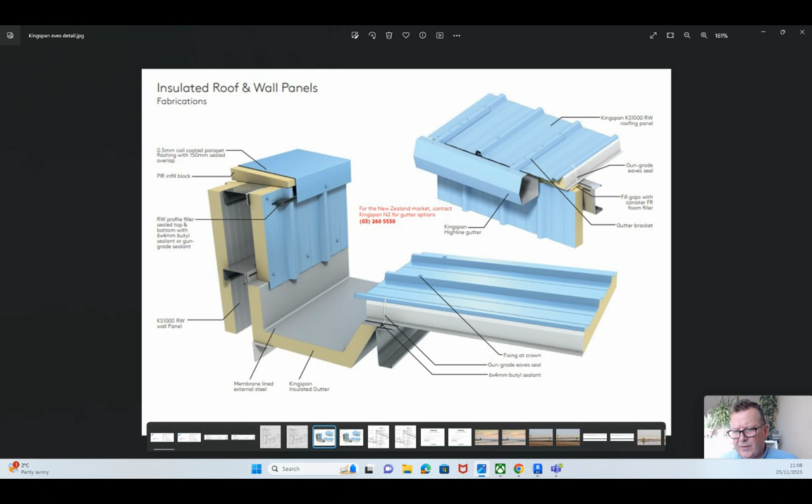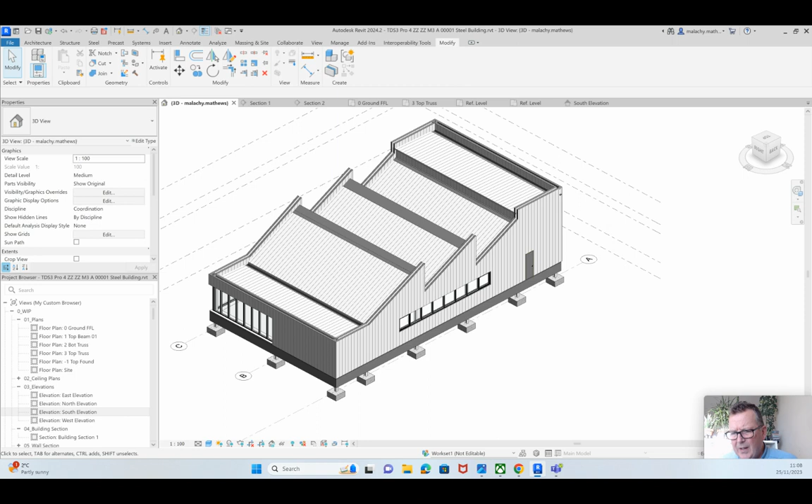Okay, so there's a couple of different ways you can go about this. Plenty of people will tell you different ways to go about it. This one is particularly tricky because it's got such sharp angles and changes in direction. So I'm going to do a model in place. Now, I'm not overly a huge fan of model in place for various different reasons, but in this case, it's probably the only thing that's going to cope with those kind of sharp changes in angles. So that's why I'm going to do it.

Now, first thing we need to do is go into our section and take a distance between the outside of the two walls. That's 444.7. I'm going to take that as around 450. I'm going to add 20 mil onto that, maybe 475, something like that.

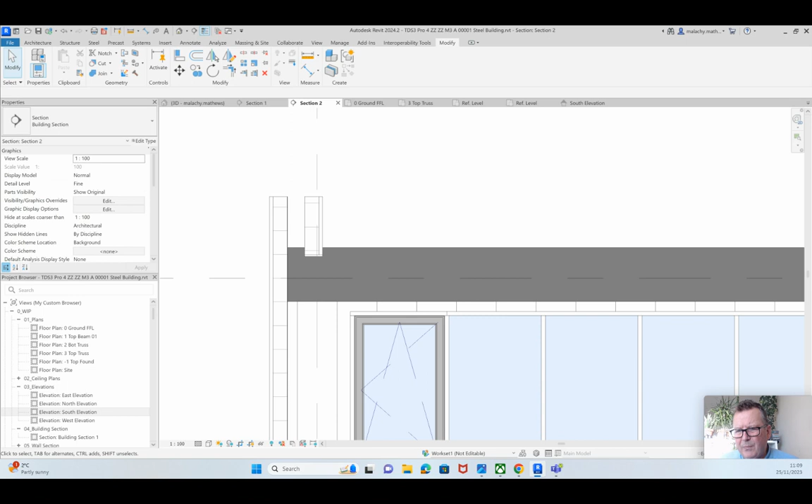Now, I want to create a profile that I can extrude around the walls here. So that's the first thing I'm going to do. So I'm going to do File, New, Family, and I'm looking for this template here. It's the metric profile template, and here it is.

Okay, now these two reference planes are the reference of origin, so the intersection of those two points is the insertion point for the profile itself. Now I'm going to work to the left of this here, because I've done this before, and it seems to work best if I do it to the left.

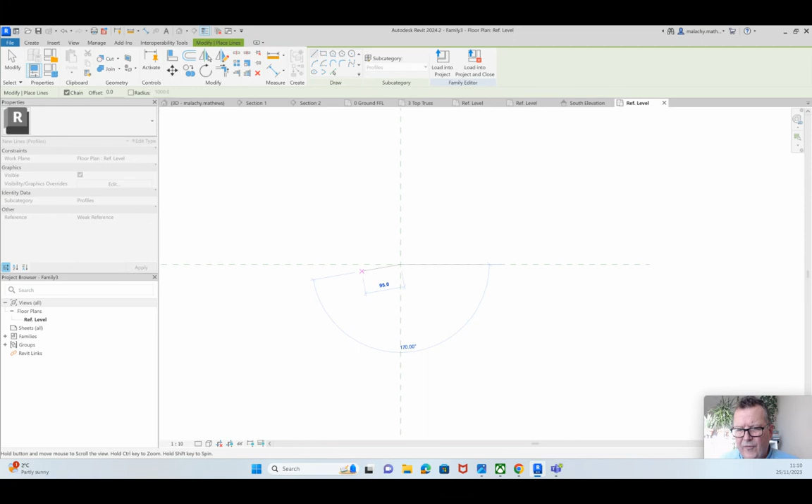Right, so let's get in here now. I'm going to go into create and line, and I'm going to come from this point and I'm going to go over my 450 or 475 as we talked about, okay? So 500, 480 even will do the trick. And I'll come down, say 150, 160 there.

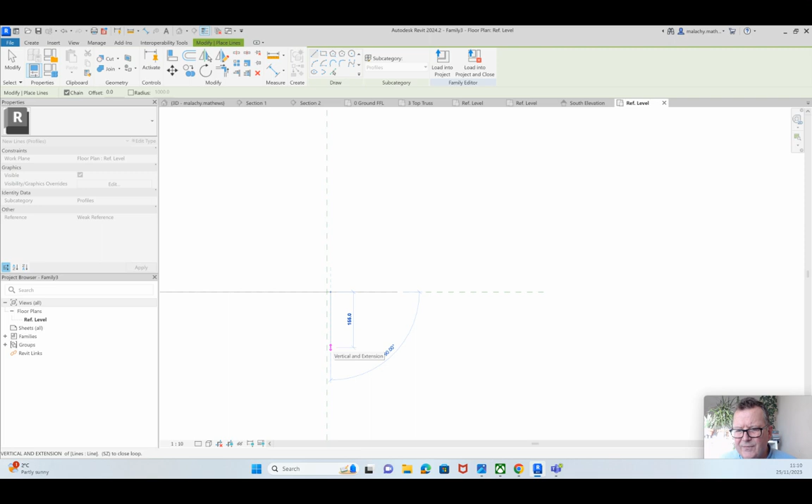Okay, and I'm going to do the same here. Create line, and actually I'm going to add maybe 10 mil just on there. Just come out, and then we'll come down our 160 here. Now I'm going to make this flat, for a particular reason, okay. But you can put an angle on this if you want to do it that way. I'm going to make this flat.

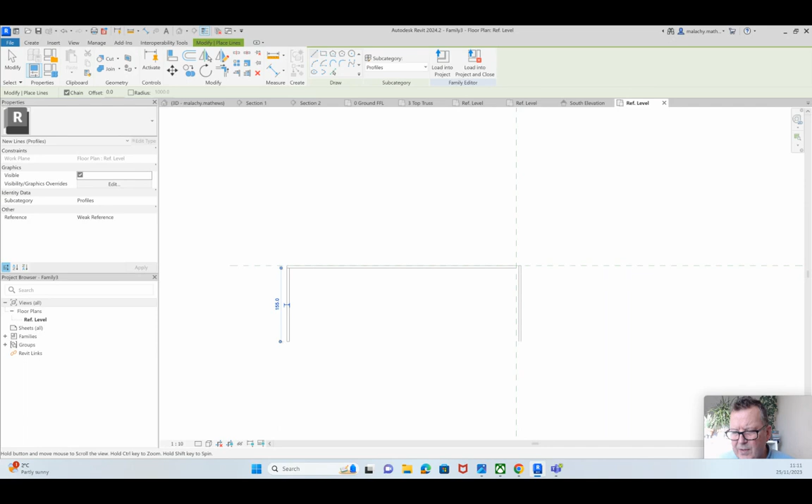Right, into my offset tool, I'm going to offset this by 5 mil on the inside here. Okay, and then back to the create line, and I want to close these here, because in order for this profile to extrude, it has to be a closed polygon line, like so.

All right. Now, I'm going to select everything. Oh, look up here now. Need to spot that. This wouldn't work if there's a gap in it. So that's important there. I'm going to just select everything, go into my filter, turn off the reference planes because I want to lift this up a little bit.

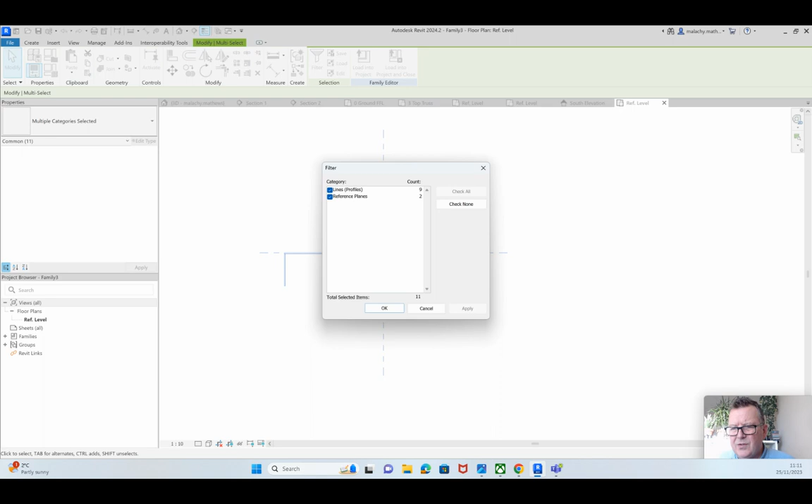Up. Now, something like that there is bang on. All right. And yeah, I need to fill that one there as well. Right, so polygon line goes the whole way around from start to finish and closes the item.

That's it there. Let's call it save as a family, and I'm going to save it into my profiles here, and this one is going to be a 480. Okay, profiles PM capping 480, save.

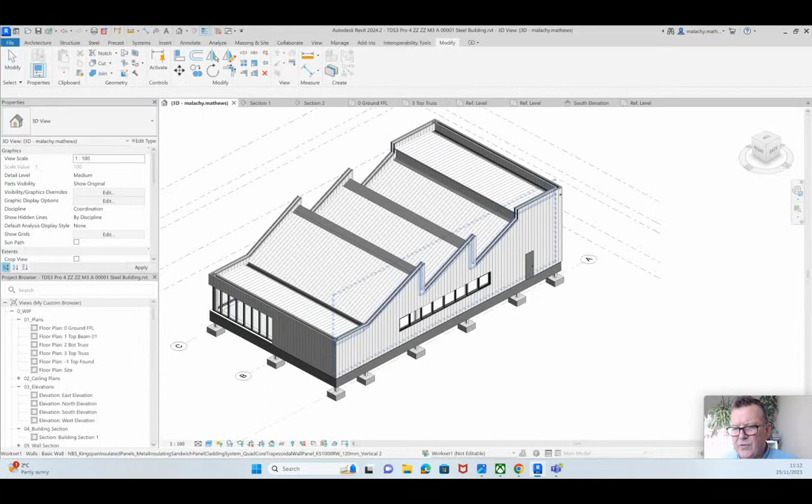Right, so that's that bit done. Now we're back into our 3D here. I'll come around and I'll start on this side here. Now, using the model in place sweep can be a little bit tricky.

Sometimes it works brilliantly, and other times it doesn't because of various elements. One thing I discovered is that this external wall was slightly higher than this one here, and that was causing a problem.

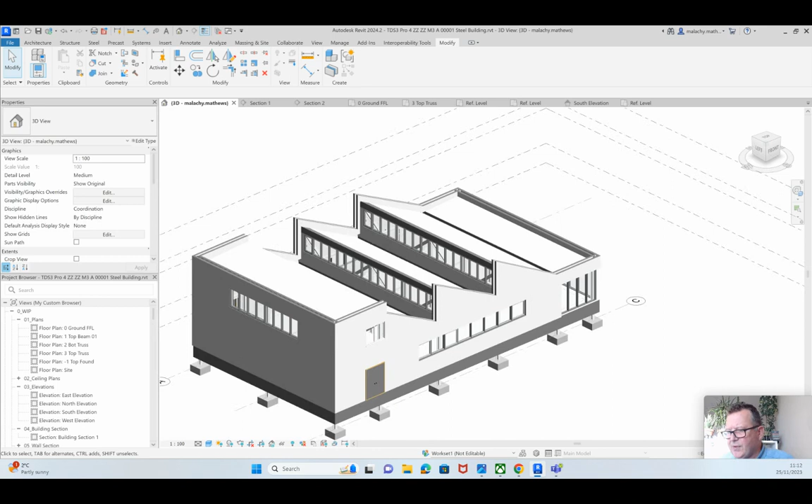So what I'm going to do is this four times: on this side, that side, and here. I know that's going to work rather than trying to run the whole thing around the whole way, because it loses its way. There's nothing more frustrating than trying this and finding it's not working, not working, not working.

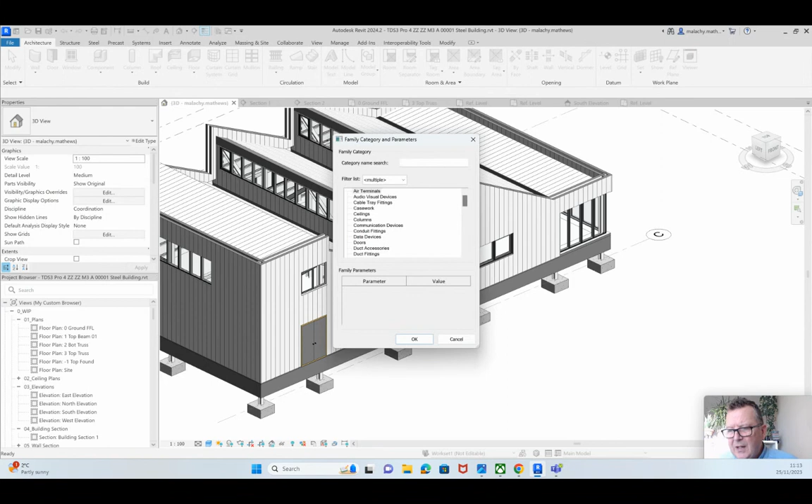Anyway, here we go. We're into architecture, component, model in place, and we're coming down to walls. I'll just call this walls 1. Now the next thing is it's going to be a sweep, this one up here, and we're going to pick the path. I'm going to pick the outside line here.

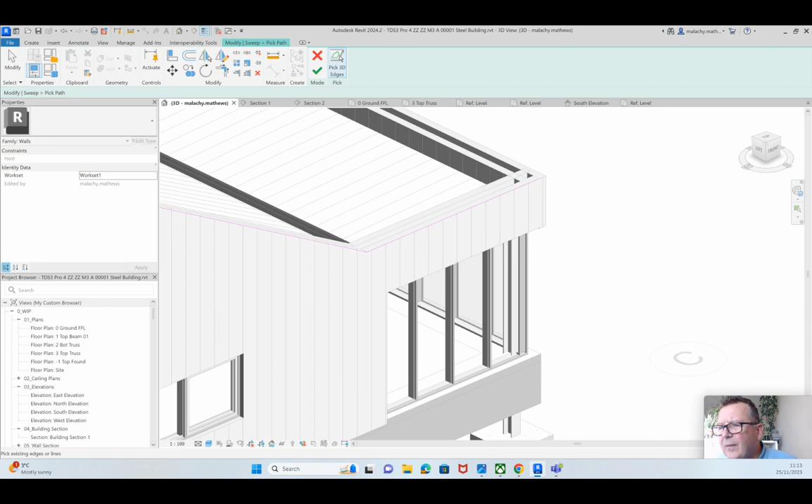All the way down here - this one, that one, and this one here. Now that is the reference plane. So part A of this is you pick the line and then hit the green tick to say finish picking. Now I want to put a profile in here.

The profile is going to go in on this reference plane, so we don't need to search anything here. Just hit the drop-down box because we've loaded this into the project, so it should be the PM capping.

Did I load this into the project? I don't think I did. So I'm going to go back to, I think it's that one there, wasn't it? Yeah, so load into project, that one there. All right, got to do that.

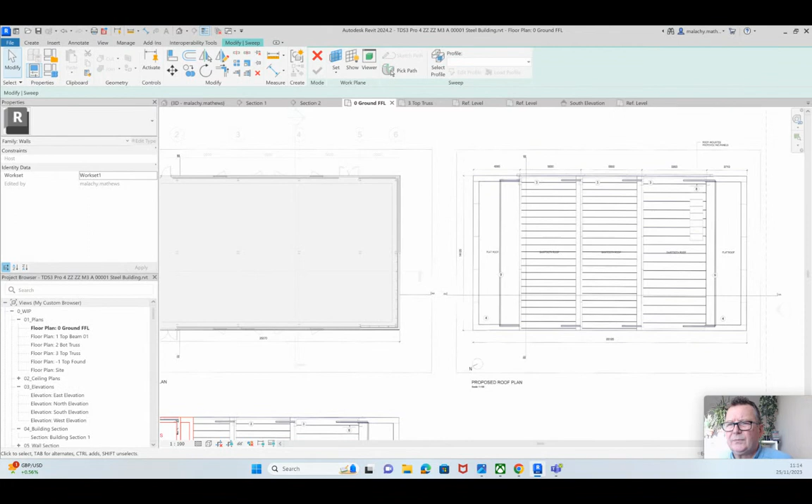Now we're back in here, let's see if we can see that. So select profile and see if it came in as the 480. There it is, perfect, PM capping 480. You can see that's how it's come in here. Now all I need to do is finish this and hopefully it will extrude the whole way around - and it's done that.

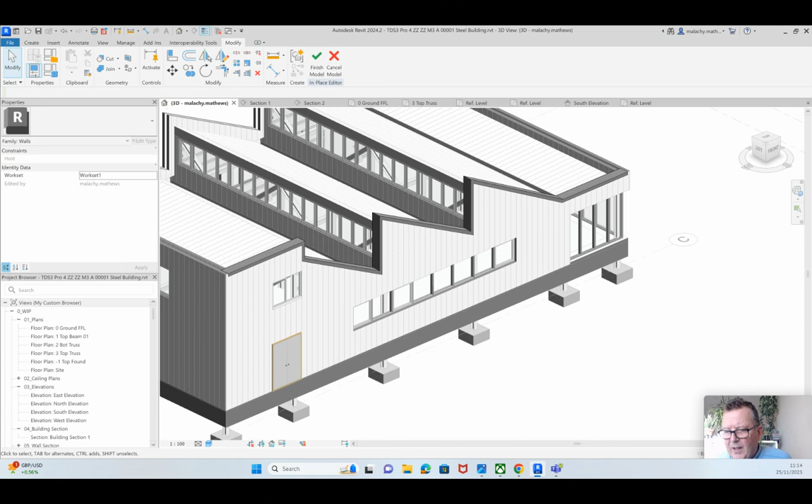So I'll do that one more time for you here. All right, so it is going to be... escape, we'll finish that portion of the model. And we're going to do this bit here now - architecture, model in place.

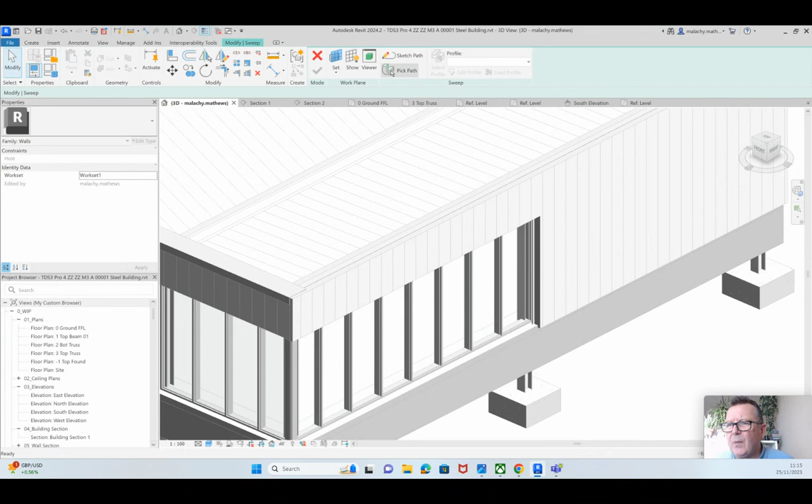Right down to the bottom here, walls, okay, just accept the name. And we're going to do a sweep and pick the path, which is that path there. We're going to finish that, then drop down and get our 480, and we will go okay and okay. Now that one's done there.

And then we'll come around the corner and do this again. So it is finish model, architecture, component, model in place, walls - all right, walls 3. And so we're going to do a sweep. I'm going to pick the path here now again.

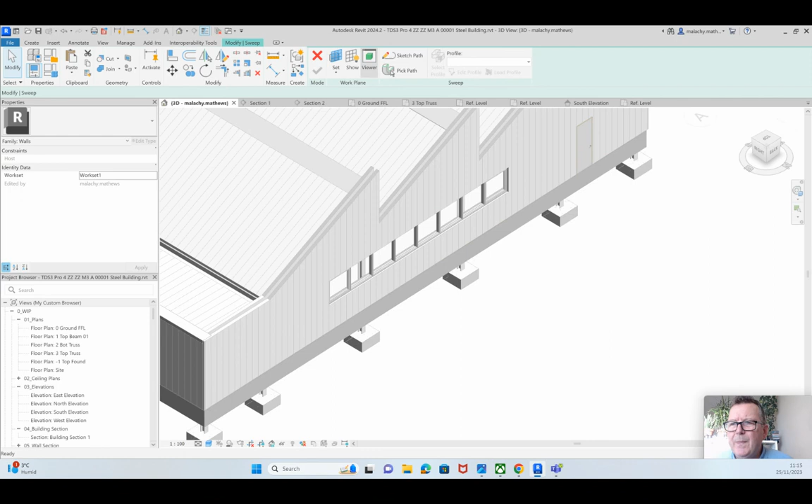Now you can see how it's coping with those kind of sharp angles pretty well, so that's good. Finish that and select our 480 again, and finish - now there's that one. And then we will finish the whole thing by doing this for a last time. So it is finish that model.

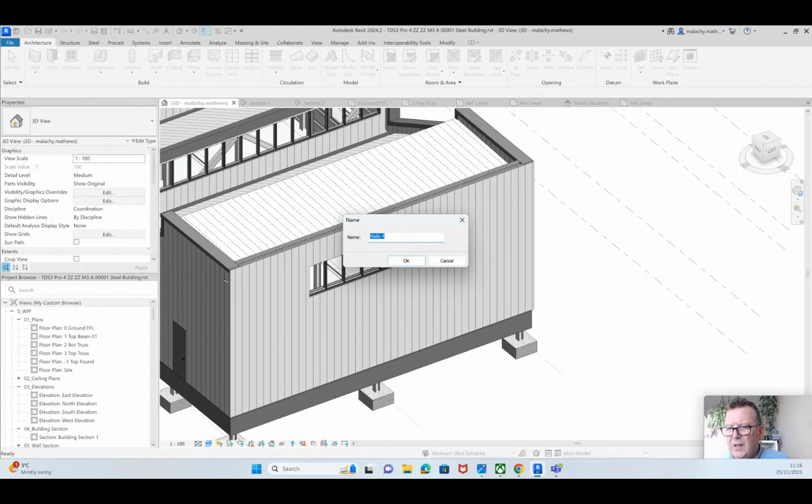Architecture, component, model in place, down the bottom, okay, those four. So make sure that you create the profile well - that can be used. That's finished. Down to the 480, there you go, and finish. Now, so there's my capping the whole way across.

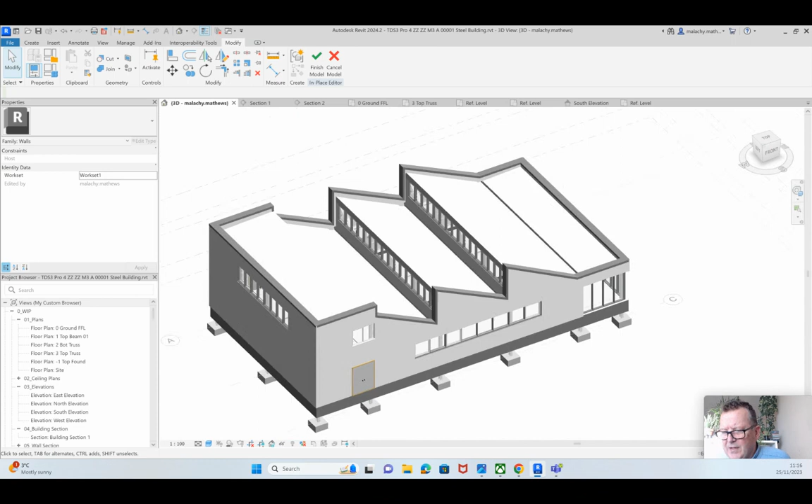You'll get little bits and pieces here, which if I had a bit more time I would take care of. But we've basically got the whole thing through there. Let's go in and have a look at this - finish the model. Now you can see, so there's the capping coming down in the section here. Do it in that section one, and again you can see the capping sitting nicely up there.

Right, so that kind of brings to an end the external part of this project. I think I've got everything covered there. So we might just take a look at the interior walls, and I'm going to try and set some views up on sheets. I'm also going to talk to you about using multi-category tags and how we can put our construction notes and all that kind of stuff in here as well. Okay.